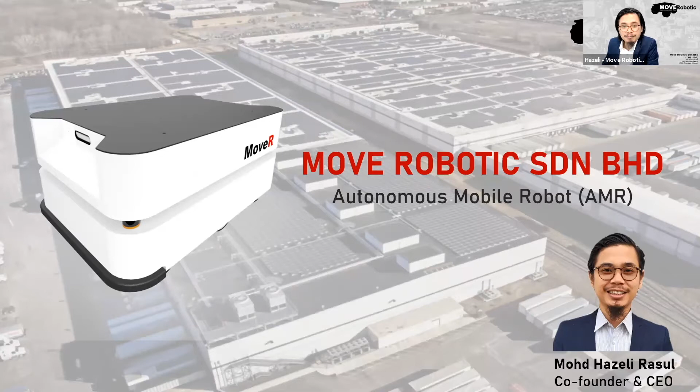I'm a co-founder of Move Robotic Sdn Bhd. Today I would like to share with you about autonomous mobile robot, or in short, AMR. Okay, let's start with what is AMR.

Autonomous mobile robot is a combination of two segments: autonomous and mobile robot. Autonomous means independent and having the power to make its own decisions. A mobile robot is a robot capable of moving in its surroundings, like locomotion. It doesn't matter whether it uses a set of wheels, a tank track setup, or any leg mechanism—as long as it's moving on the ground, we can call them mobile robots.

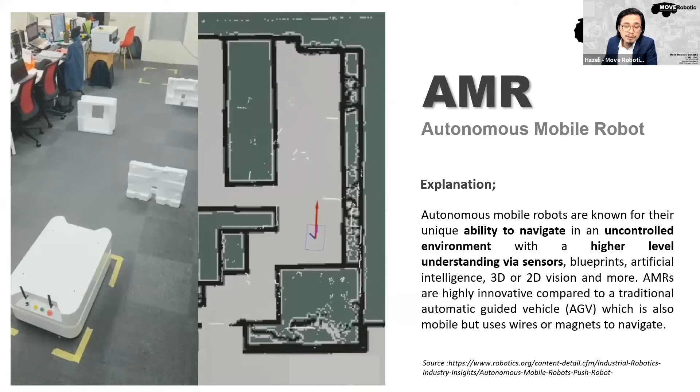By this, we can also explain AMR is having a unique ability to navigate in an uncontrolled environment with a higher degree of understanding of its surroundings via a set of sensors and AI, artificial intelligence, compared to AGV, which is also a mobile robot, but uses magnetic line as a guide to navigate.

Autonomous technology allows mobile robots to move more freely and independently, avoiding any obstacle on its path and continuing to complete its tasks, whereas AGV needs to stop and wait until the obstacle is removed. I believe many of you are familiar with AGV, automated guided vehicle, which is widely used in industry like production factories and warehouses.

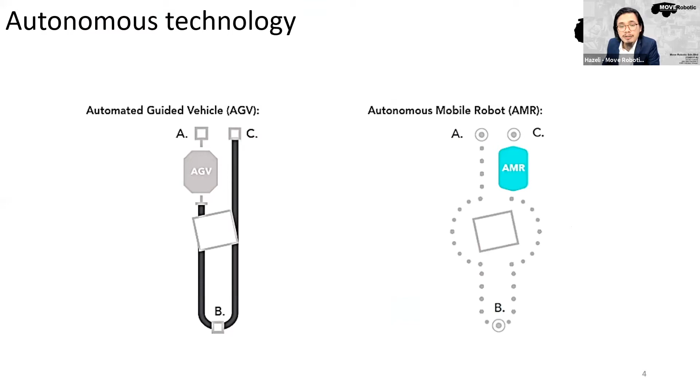Let's go deeper into the comparison between AGV and AMR. First is navigation: AGV uses a guided method while AMR uses trackless, natural navigation. Secondly is the ability to avoid obstacles: AGV has to stop when an obstacle is in its path, while AMR is capable of moving around obstacles and finding the best path toward the destination goal.

Thirdly is flexibility: AGV needs a new installation of a guided path in order to make a new path, while AMR just needs to scan a new map of the new environment and assign a new position using a fleet management system software.

Next is cost: AGV is surely less expensive compared to AMR. This is due to AMR using a set of complicated sensor fusion and a sophisticated autonomous control system. The most common sensors used in AMR are 2D LiDAR, IMU accelerometer, and wheel encoder. More advanced AMRs use 3D LiDAR or multi-depth cameras. But even though AGV is much cheaper, the maintenance cost of the magnetic guided tape is quite a challenge long-term, as it has to be changed every 6 or 12 months depending on the environment. So this adds up the maintenance cost of the AGV.

The next comparison is installation complexity: AGV requires more complex and time-consuming installation, whereas AMR is fast and easy to deploy. On reliability, some say AGV is more stable compared to AMR, but nowadays fast-changing technology allows AMR to have very good operational reliability. Both mobile robots use different safety standards, but both aim to ensure the robot is safe to operate in its environment.

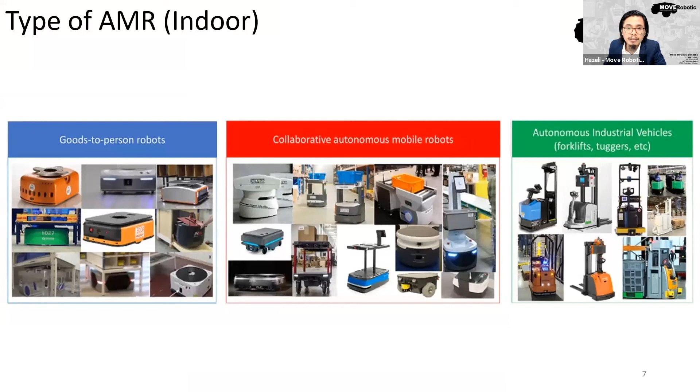Moving to next, this is the type of autonomous mobile robot for indoor usage. We have the goods-to-person robots, collaborative AMR, and autonomous forklift or stacker or tuggers.

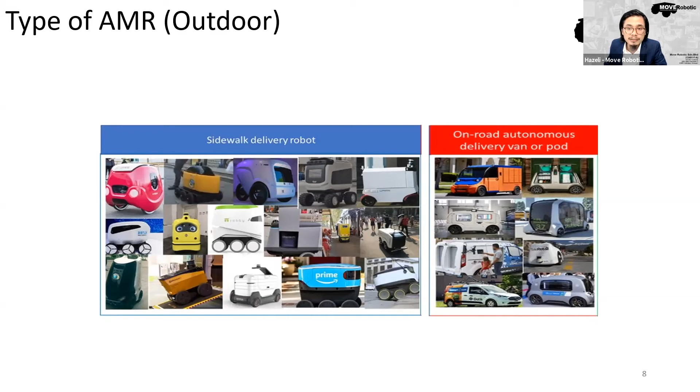They are using the same autonomous system, but in order to run on the road, it requires a very high level of safety standard, similar to autonomous vehicles, and have to pass through a rigorous test before they can be deployed on the road. Okay, let's look at the market size of AMR.

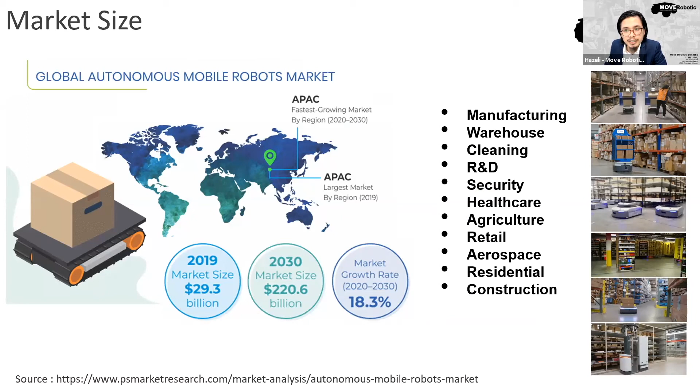In 2019 alone, the market size is huge. It's already 29 billion USD, and expected a whopping 220 billion by 2030. This figure is mostly contributed from manufacturing and warehousing industry, while other industries are also slowly growing forward.

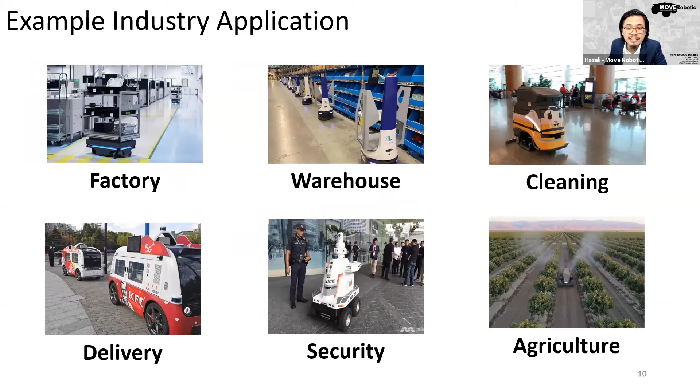So Move Robotic, who are we? I can say that we are more of an R&D company focusing on autonomous technology and mobile robot technology. Our objective is to harness the power of robots. Our mission is to free humans from dull, dirty, and dangerous tasks. And our vision is to accelerate autonomous robot and smart workforce in Asia.

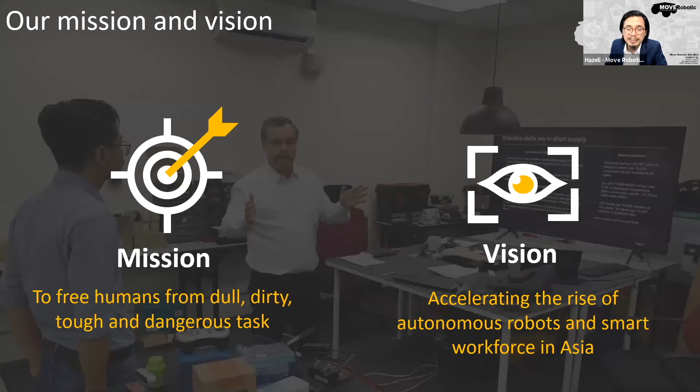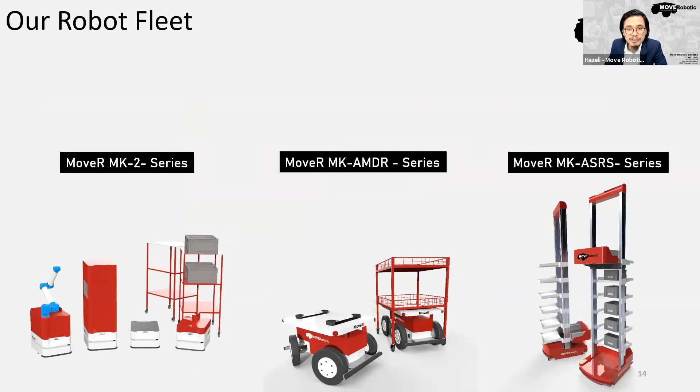So introducing our own solution, Mover, an autonomous robot fleet, self-developed locally by Move Robotic. We have here indoor autonomous mobile robot, outdoor autonomous mobile robot. The latest one is the goods-to-person robot, which can pick up a container from the rack and deliver it to the person.

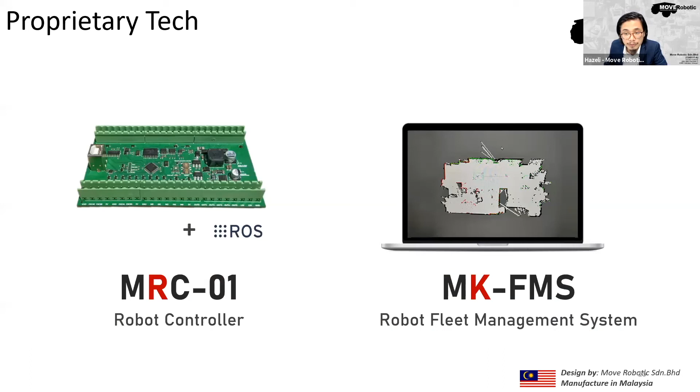All of these robots use our own controller board inside and our own custom fleet management system, all developed locally. What we do here, we design the mechanical, electronics board. We do our own programming, our own motor control and navigation, and everything ourselves. So customization is not a problem. We can develop a small or big autonomous mobile robot.

Our roadmap this year is focusing on indoor application. Next year, we'll be focusing on outdoor application, and also we will move towards agriculture and on-the-road applications.

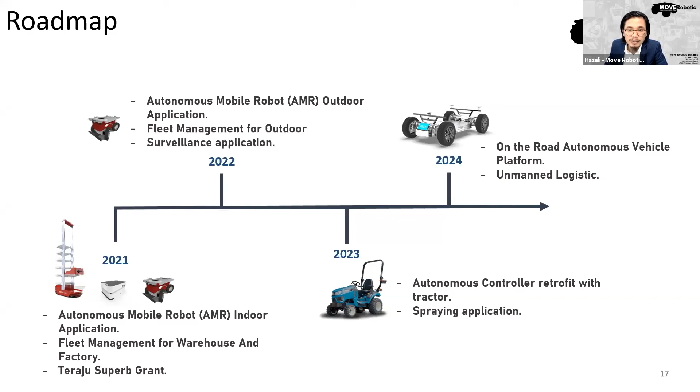So we invited all of you here to come to our Autonomous Training Center at MTDC UPM Serdang, where we developed with MTDC, where professionals, engineers, technicians, or students can come here and learn about the technology inside the AMR. So please visit our website and contact us for further information about this.

Our achievements so far: we are one of the participants of Teraju Superb Grant in 2021, and also we already completed a Cyberview Living Lab Asset program this year. And also this year we are very, very lucky to be among few selected from many applicants to join a prestigious Petronas Future Tech 2.0 program in collaboration with Iskandar NTM, which is powered by 500 Startups and supported by National Technology Innovation Sandbox NTIS.

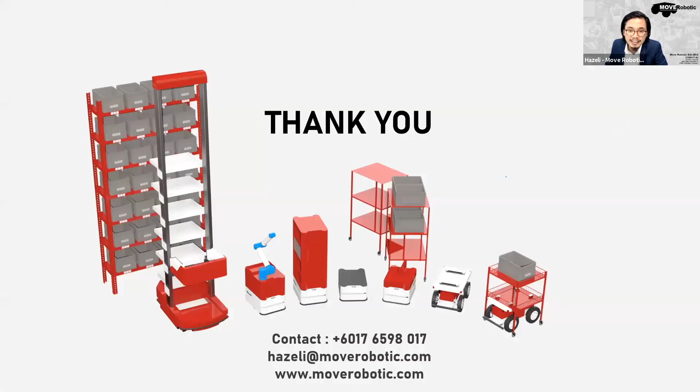I think that's all for my sharing. This is our contact information. Easily you can find us on Google, just type Move Robotic and you will find www.moverobotic.com.